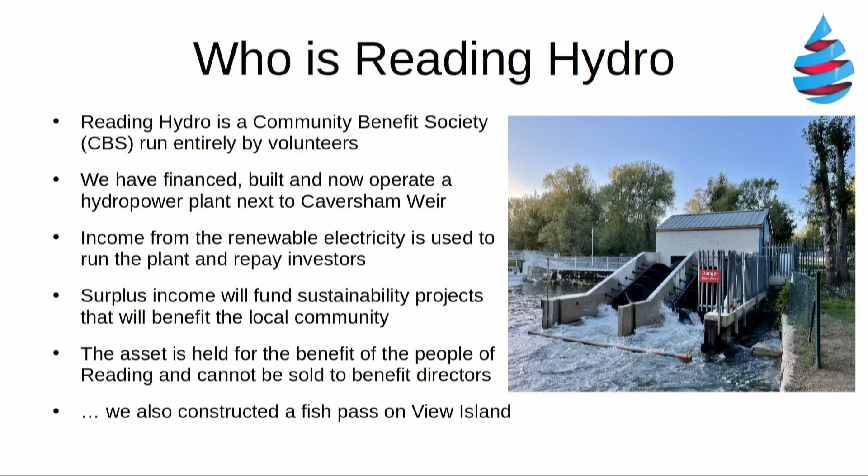I'll go through a little bit of the history of how we got to where we are. There's an organisation called Transition Town - there's probably transition towns in most large towns in England and Wales. Transition Town Reading was an existing group, looking at general energy things.

A group came together in 2014 and said, we've got the Thames here, we've got all this water flowing over the weir, we should be generating some electricity from it.

There's a huge amount of permissions, paperwork, planning, way leaves, etc. that have to be gone through - Council, Environment Agency, government, electricity. You wouldn't believe the amount of paperwork involved in doing something like this.

So we had some initial funding. This was just the group that was sort of forming around it - everyone put in 100 quid, and we had some money to start doing some initial surveys.

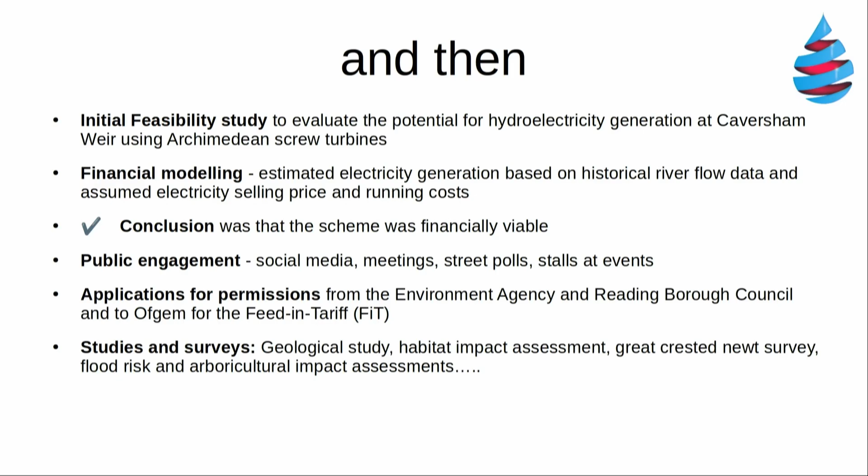And we started the process of all the applications - Environment Agency, Council, Ofgem, and the crucial thing was trying to get a feed-in tariff agreement. That's how much we're going to be paid for the electricity we generate.

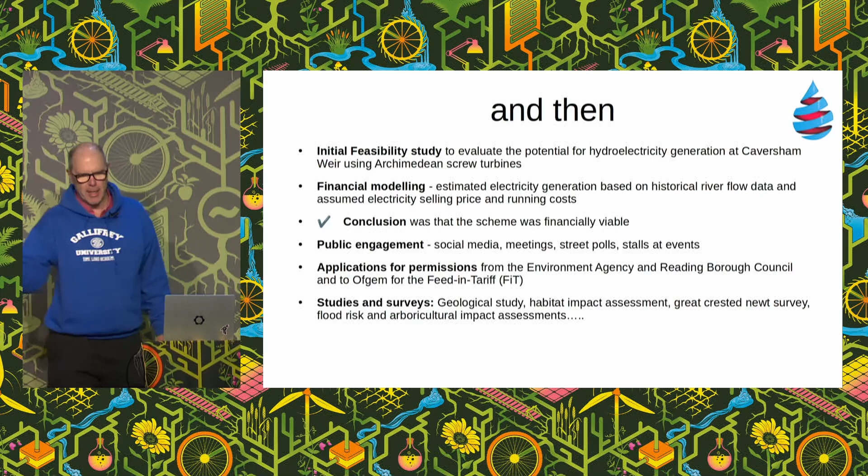Then we moved into the major funding. That was a share offer scheme where we were offering shares for investment in the plant. We raised, in several phases, £1.2 million.

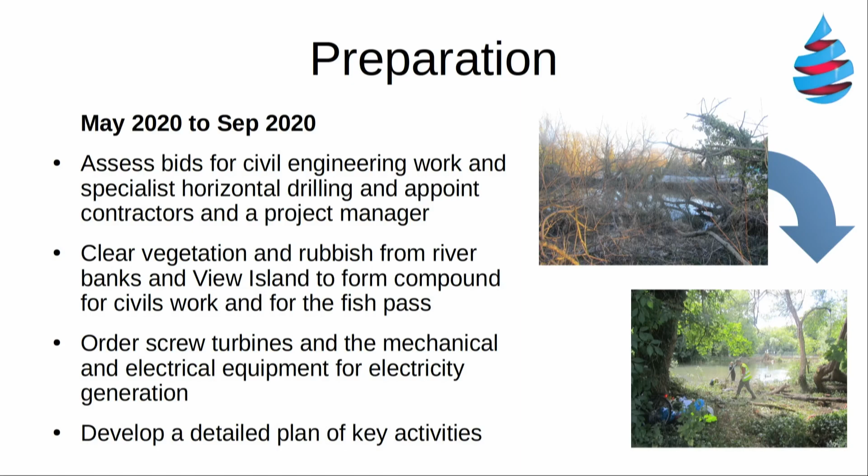Once we had that, then we started the prep work. A lot of the prep work was all done by volunteers. At this stage, we were negotiating with various suppliers to build the major parts of the hydro scheme. The first major thing we did was the pontoon bridge.

That was so we could bring the heavy equipment across. I'll show you an aerial view. There's a small stream called the Mill Stream - we had to cross over to get to the end of the weir in Reading.

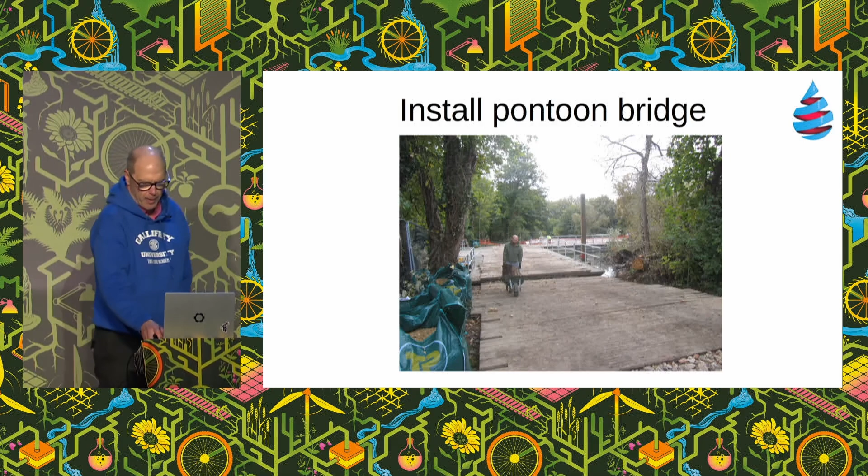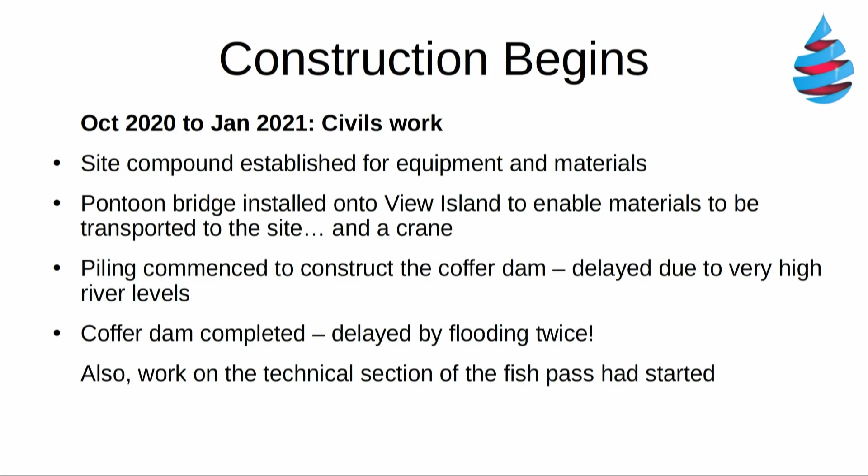October to January 21 - if you remember, that year was quite severe flooding. The way you do this, you build what's called a coffer dam. I've got a picture of this - this is a coffer dam.

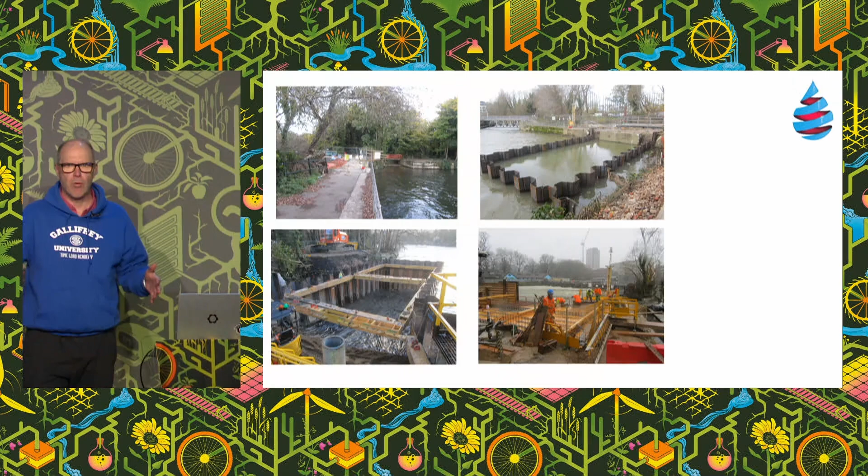It's a set of corrugated metal plates that are driven into the riverbed, and once you've sealed that all up, you can pump the water out of the middle, and then you've got somewhere to start working. The coffer dam itself was flooded twice, and we had to stop work.

At this stage, this is all of the civils work - the digging out, the laying of the concrete for the actual sluices where the water would flow.

At the same time, part of the agreement to build this is that we would have to deal with creating a fish pass. There is a fish pass on Caversham Weir, but it's only really good for strong fish, like salmon and trout, to swim up. Eels and things like that can't swim up - it's too steep.

So we were creating a fish pass through View Island, which is off to the left of these pictures, and that was all done by volunteers.

Construction - the major civils completed February 21. If you remember, this was in the middle of COVID. We were doing community construction at this time, starting to build the turbine house. Again, the turbine house was all built by volunteers.

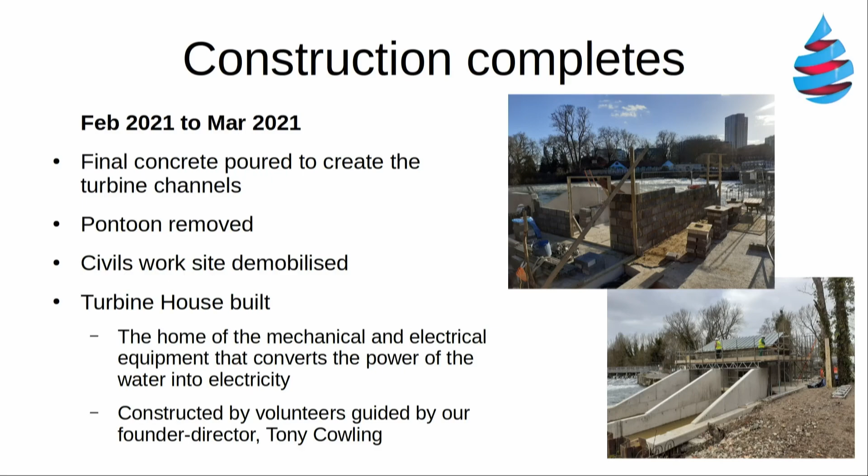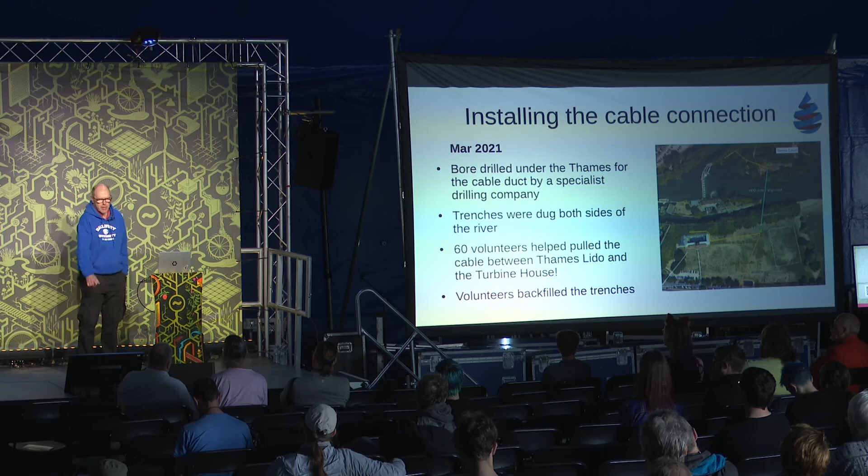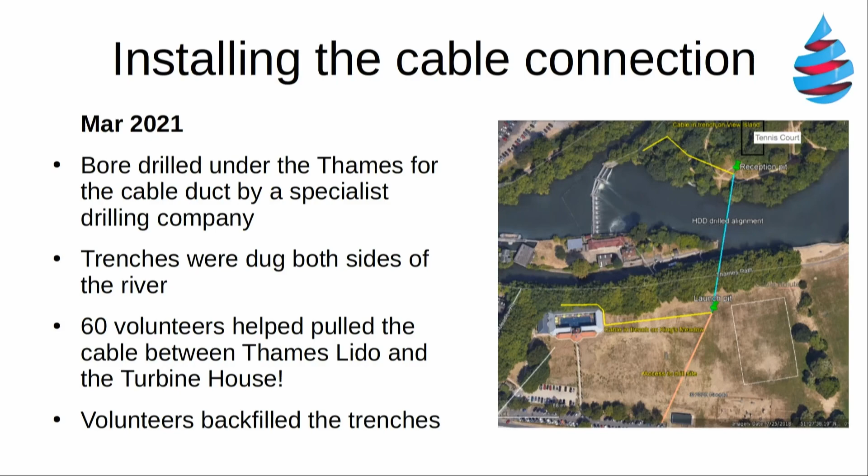We used what they call a ditch witch, which is a guided drill, so they drill underneath the Thames. We had to go across here because we weren't allowed to drill underneath the lock, so we had to move it up to this point to be clear of the lock. We then dug another trench from the other end of this back down to the Thames Lido, which is a restaurant and swimming pool, where there was a grid termination we could connect into.

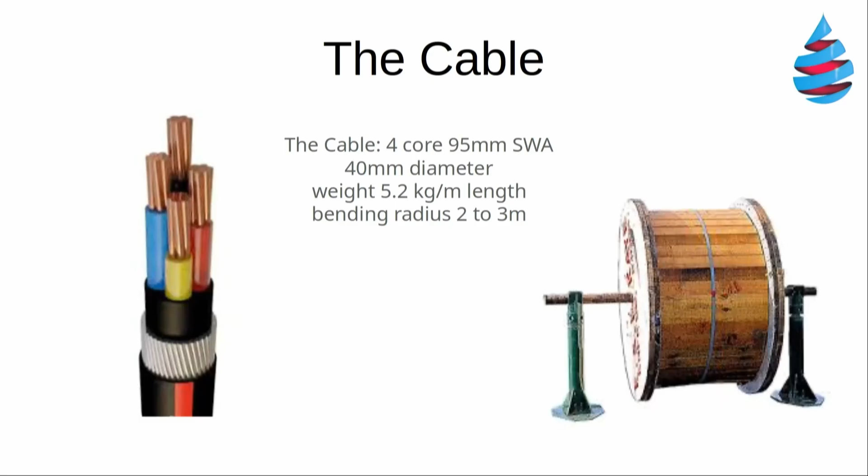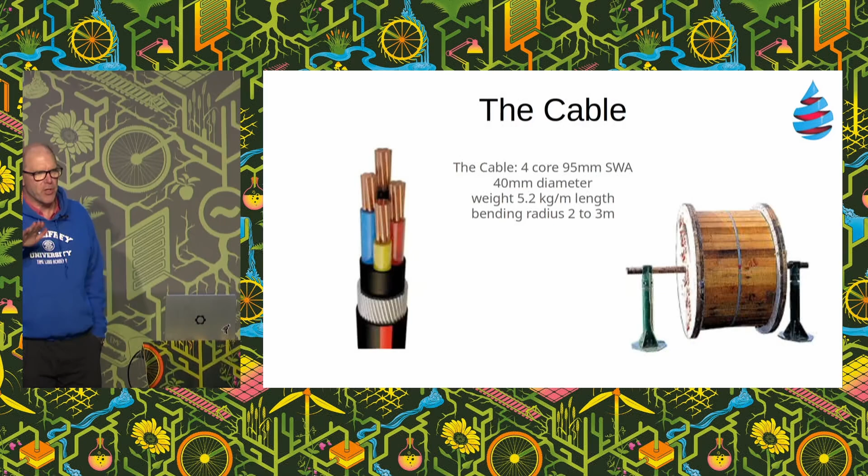The cable is a 4-conductor cable, so it's 3-phase electricity. It's sort of about this diameter. There was a lot of discussion about exactly what size of cable, because the cross-sectional area of the metal contacts determines the resistance of the cable, and so more resistance means more energy loss on the cable. So all of this calculation goes in place to work out what's the best solution for that.

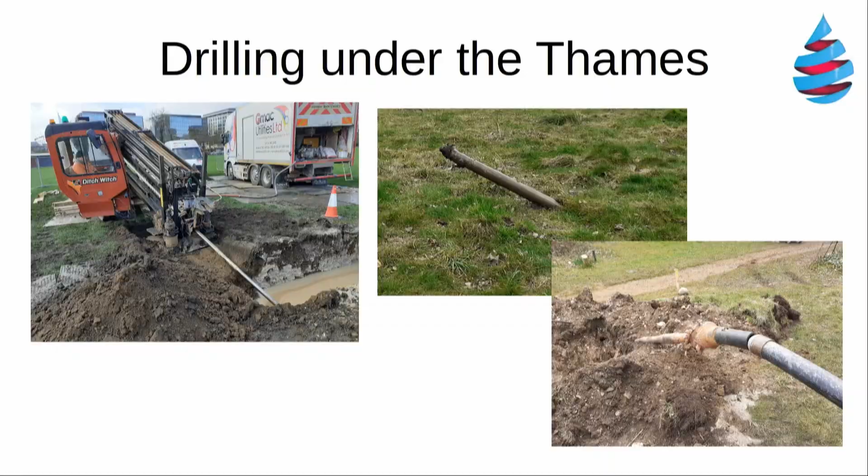Here's the actual drilling under the Thames. We then had a one-day event where we had 60 volunteers from Reading, and we pulled the cable through the duct. So you can see here on the left-hand side is the actual Ditch Witch drilling the hole.

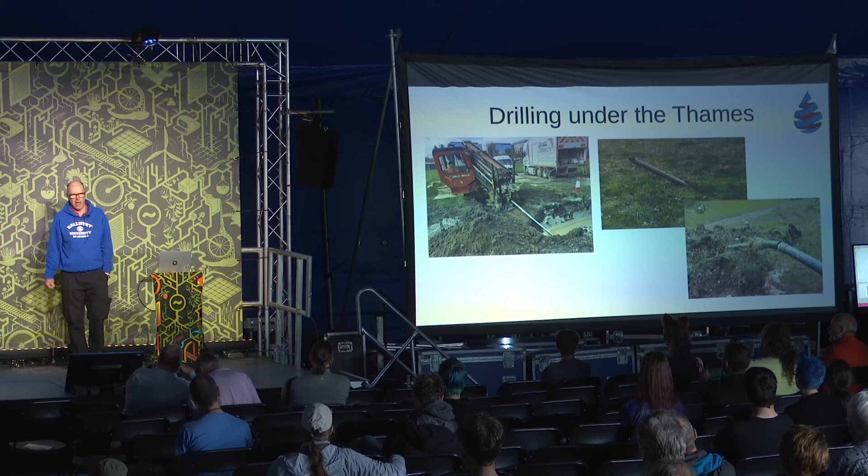Once the hole was drilled through, we attached a pipe to that and pulled the drill back, and that pulls the pipe through it. We then feed a draw cable through the pipe, and then use that with a winch to pull the cable through the pipe.

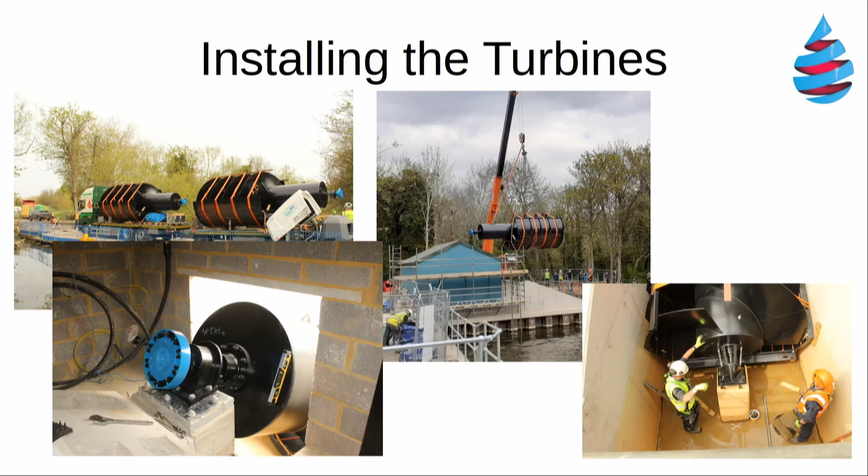We then had the actual turbines installed. These are the turbines that were made by Spans. They were shipped over from Germany and arrived on low loaders. We then had a crane to lift them into position.

The rest of the equipment installed, so you can see there the green are the actual generators. There's two generators, and behind that is a gearbox. The turbines themselves turn at around 30 RPM, but the generator needs to turn at about 1500 RPM in order to be optimal in generation.

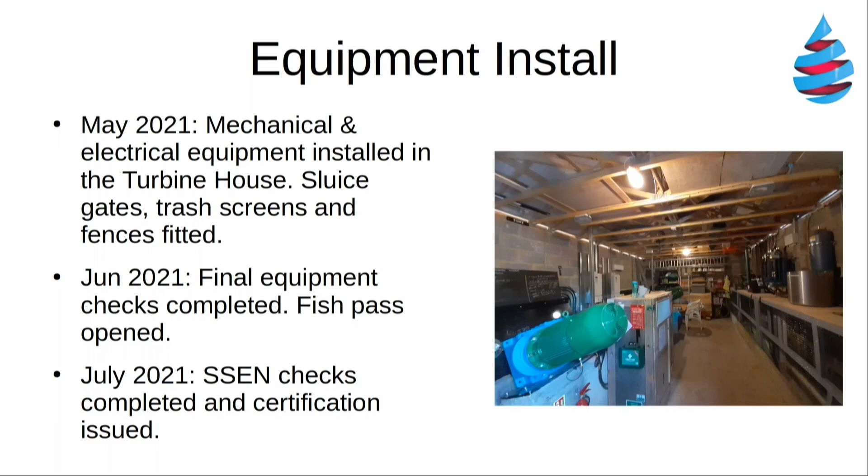We then had a lot of checks and compliance forms and things like this to fill out, to check that all of the equipment was installed to specification.

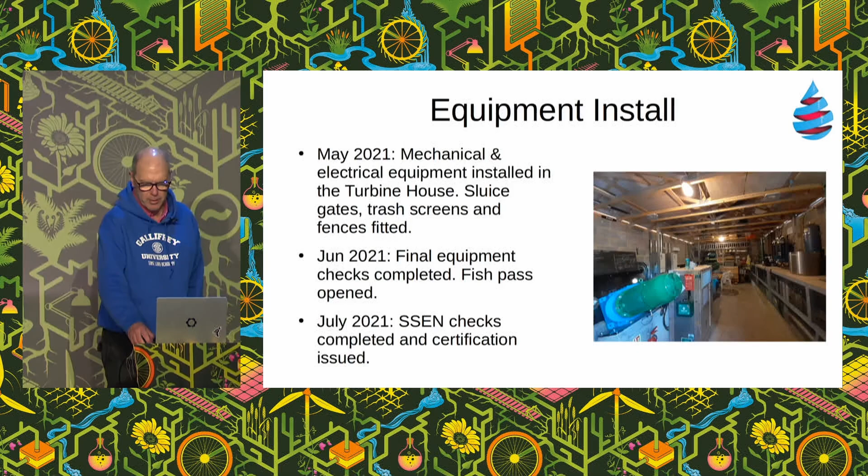July 2021, we finally got all the certificates and we had the opening ceremony. But there was a drought at that time. The flow in the Thames was very low. So we were there, we were all ready to go, but we couldn't switch on.

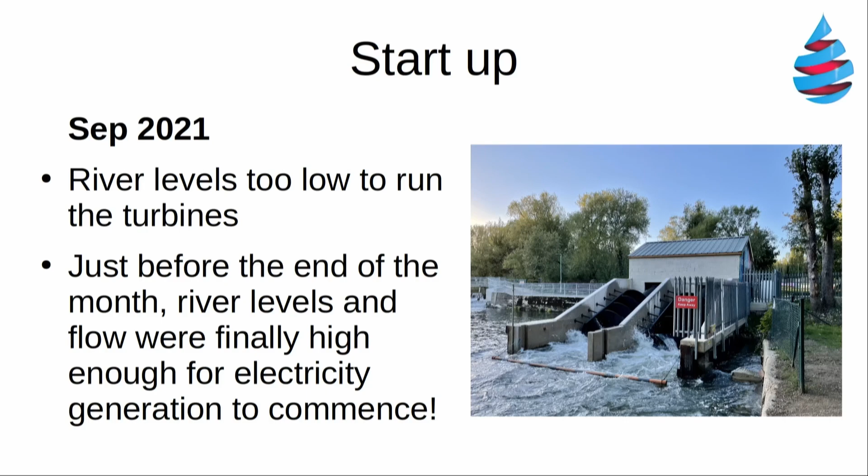September 2021, finally we'd had a bit of rain, the levels were a little bit higher, we were at a point where we could just turn on. Just at the end of September 2021, we started generation.

The main bit I've been involved in is the data system, the website, and how we collect all the data. All of our data is completely open. Anyone can go and access it. There's an open API, and I'll show you the pages on how you can connect and examine our data.

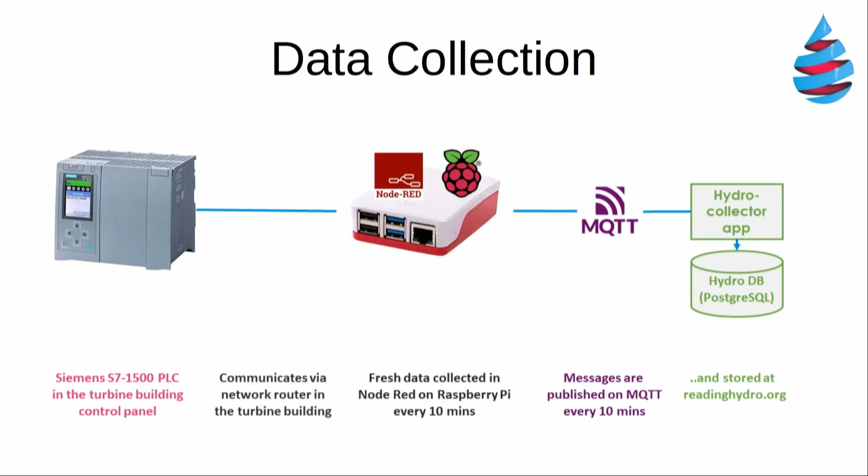The generation system is controlled by a Siemens control system that runs Windows CE. Yes, it's still out there and being used. Essentially, it's a version of Windows 98, which is the sort of GUI interface system. We've plugged a Raspberry Pi into that, and with some libraries we're able to pull the data off the control system to tell us what's going on.

We then send that over MQTT to a cloud server running in Linode. That puts it in a database, and then the website accesses the database and displays it on the website.

We also have in Reading a LoRaWAN network. It's run by the council. It sort of covers the whole of Reading, and we put a base station for the LoRaWAN network in the turbine house. That gives us good coverage around that area, and it's actually part of the council network, not really part of Reading Hydro, but we use it.

And we use it for a number of sensors, the environmental sensors, so fire detection, temperature, humidity. We have sensors on the doors. We don't have any cameras. There's still a bit of a debate there, but we just don't have any cameras.

We also have, one of the things I did, was the alert system. So we looked at things like PagerDuty and things like that, all very expensive. And so I said, I can do better than that. I can write some Python and do something.

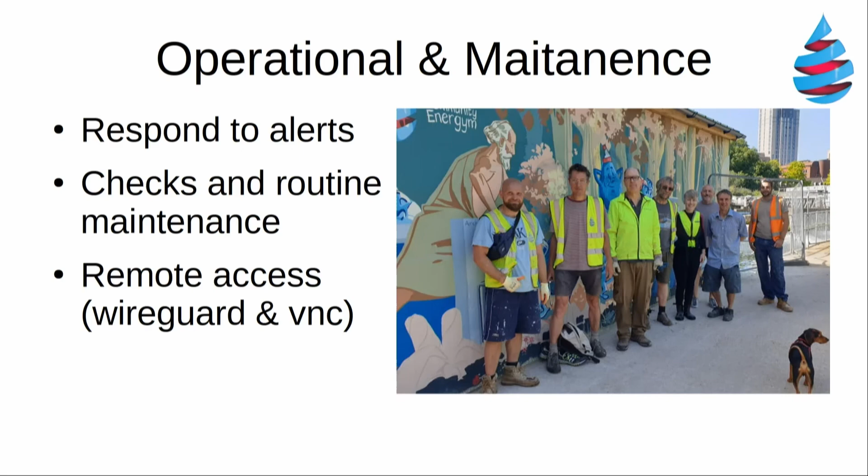The thing I didn't mention when talking about the data was the connection to the turbine house. There's no network facilities there, so we've got a Teltonika modem running OpenWRT with a GSM modem in it, and that gives us our network connection.

Remote access is achieved through WireGuard, and you can then connect via VNC onto the actual control system, seeing it as it's displayed in the turbine house.

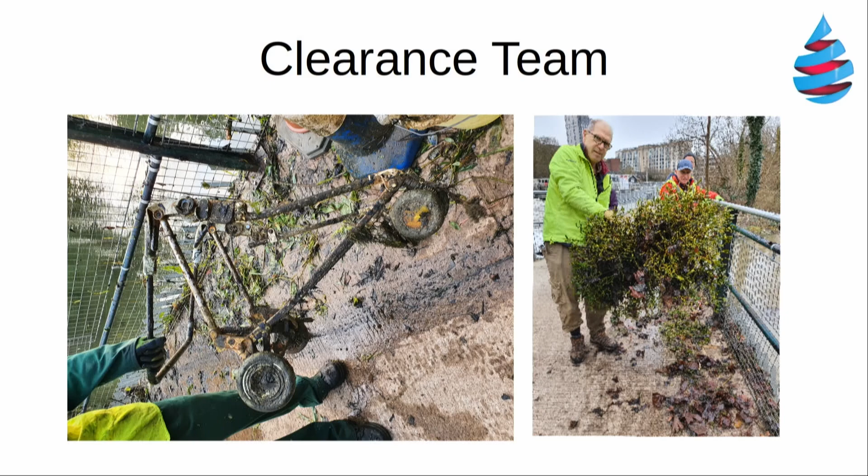We also have a team that clears the front part where the water comes in, which accumulates leaves and shopping trolleys, bikes, and everything you could possibly imagine gets washed into there. We have a clearance team that comes regularly to rake the leaves out and keep the inlets clear.

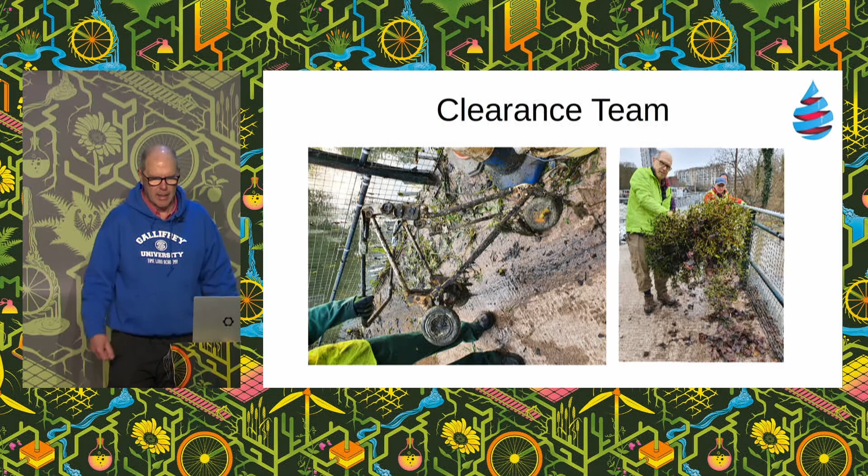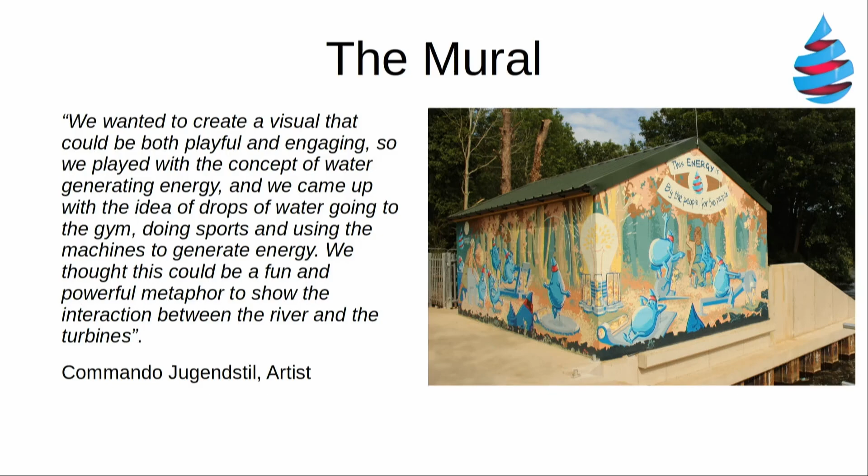We also commissioned a local artist, Commando Jugendstil, who designed the mural. We actually had a competition for the mural on the outside, and then he designed it, and volunteers came and filled in all the bits, did all the painting, did all the little twiddly bits. There's a whole lot of little animals along the bottom - moles, rats, beavers, etc. A lot of those are filled in, and it's quite a talking point in Reading.

We have had a bit of graffiti. We've put some graffiti paint on it, which is a sort of transparent paint that lets you take off the graffiti, but we've had to repaint some bits because they've used car spray-on paint, which is really tough to get off, but not too bad.

We also have climate stripes on the side of the turbine house. This is an initiative by Ed Hawkins at Reading University - you may have seen climate stripes around the place. They give you a visual indication of the warming of the planet, and we've got a little space on the right where we're going to add new stripes as the data comes in.

I do want to just show you, if I've got time - I think I've got a couple of minutes - some of the live data.

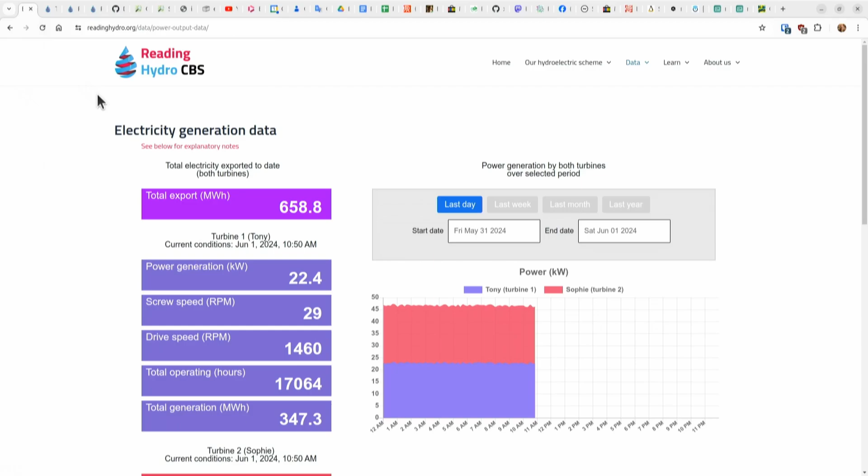So this is the generation at the moment. You can see the two turbines there and the amount of power that's being generated for each turbine.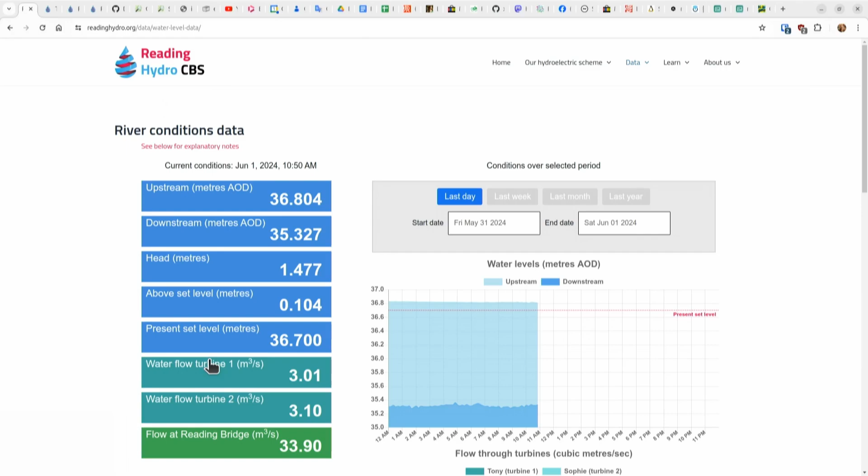And this is the other main screen showing the river levels. The important thing about electricity generation with these things is it's not the flow of water, it's the drop of water. So you've got the water level incoming to the weir, incoming to the turbines, and then the level going out downstream - the upstream and the downstream. The difference between that is the head, and that's what we're actually using.

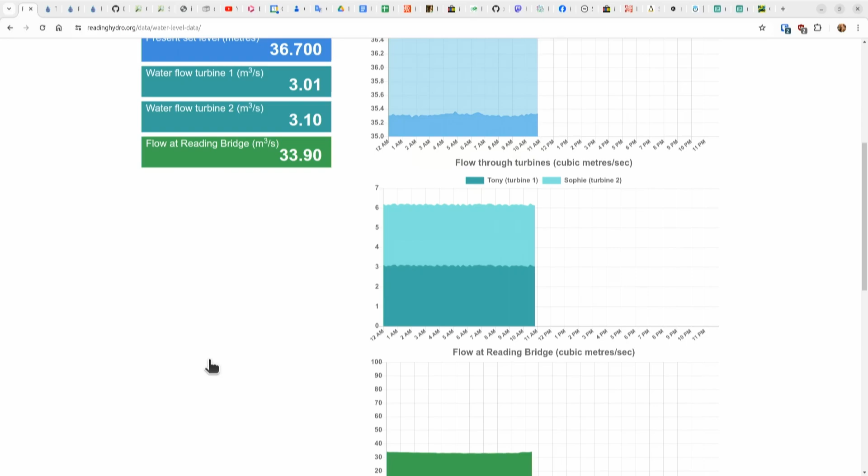Each turbine is using about 3 cubic meters of water a second, so that's 6 cubic meters a second for the two turbines. It takes about 3 seconds for the water to flow through the turbine. A cubic meter of water is roughly - or exactly - a metric ton, so that's roughly 8 to 9 tons of water in each turbine at any one time. It's that weight of water that turns the turbine and generates the electricity.

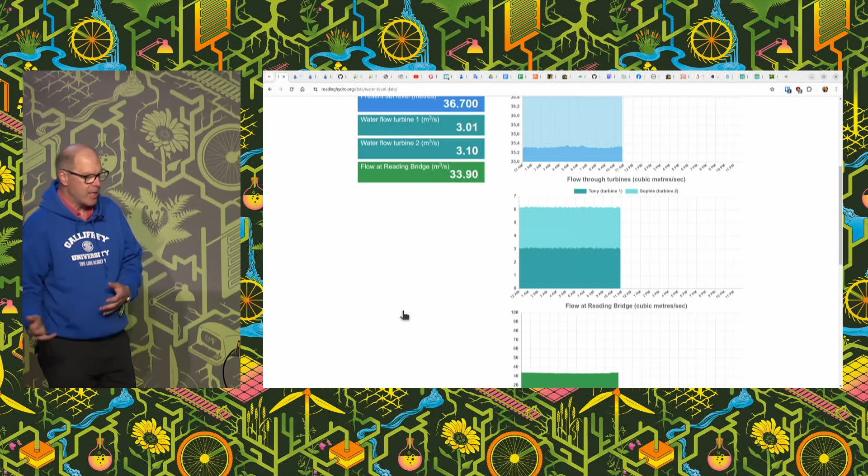You can also see at the bottom here, this is data from the Environment Agency showing the flow of water down the Thames, measured from Reading Bridge, just upstream of the weir.

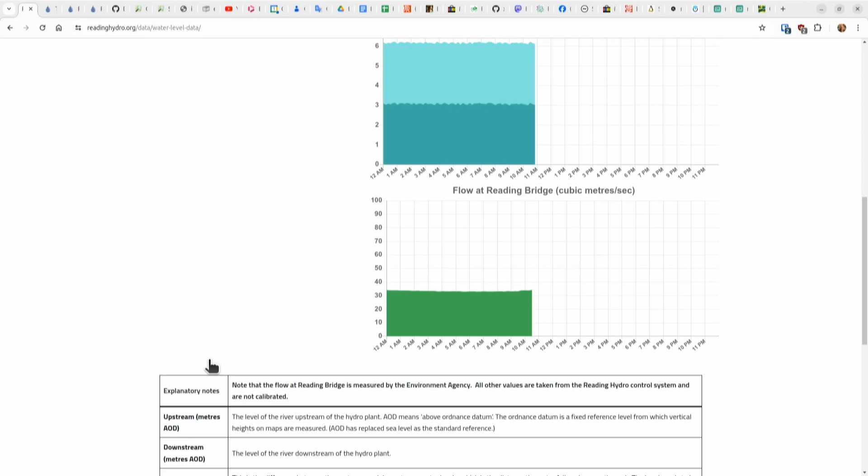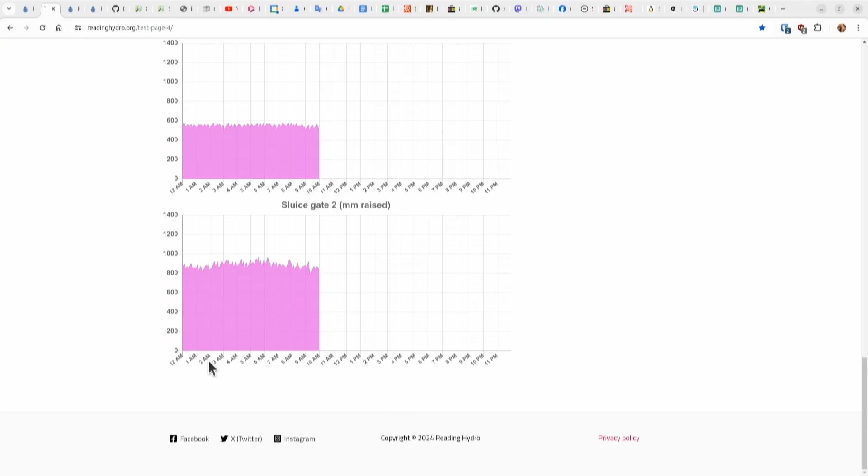This is a page we've created which just shows the environmental data, and we've added sensors to the sluice gates. The sluice gates control the flow of water into each turbine, and this is giving us level management - something that the control system didn't have.

I mentioned the data - all the software that we've generated is available on GitHub, and the API is completely open. There's documentation on the wiki on GitHub on how to use the API. If you can think of some imaginative use for the data, you're welcome to do that.

Now, if I can get back to the presentation, there we go. Thank you very much. I will be in the question tent afterwards - you can come and ask me about all things electricity generation and things like that. There's lots of things I haven't covered, so I hope that's interesting for you.